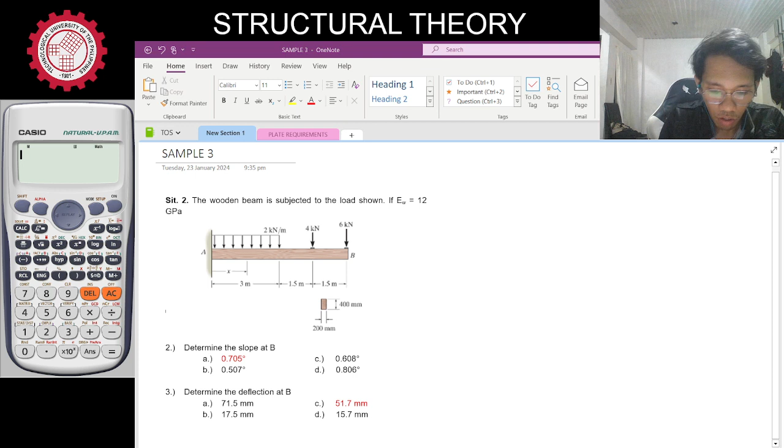This time, let's show that we can use the slope deflection method to solve for slope and deflection, not just for indeterminate reactions. So we have here a wood beam subjected to the load shown, with elasticity of 12 gigapascals. We are asked to solve for the slope at B and the deflection at B. I know you can solve this using double integration method, area moment method, or conjugate beam method, but another possible option is the slope deflection method.

Since this type of problem is a cantilever beam with fixed support at A and free end at B, the reactions can be solved easily. Since this is a determinate structure, let's first solve for the reactions.

Again, our loadings applied on the beam are all downward loads, so the moment resistance at the left support will be counterclockwise. So let's set that up: we have moment AB, which is counterclockwise. To solve for that moment, we sum up moments at A and equate to 0. Since our moment reaction at AB is counterclockwise, it becomes negative moment AB. Let's write that: negative moment AB. And then all loads will cause clockwise rotation with respect to A.

Let's solve first for the uniformly distributed load. Plus area first: 2 by 3, and the moment arm is half of the base, so this is 1.5. Next, the concentrated load of 4: also clockwise, so plus 4 multiplied by moment arm of 4.5. Then the concentrated load at the free end: also clockwise rotation, so this is positive 6, with moment arm also 6 meters. Then we equate this to 0.

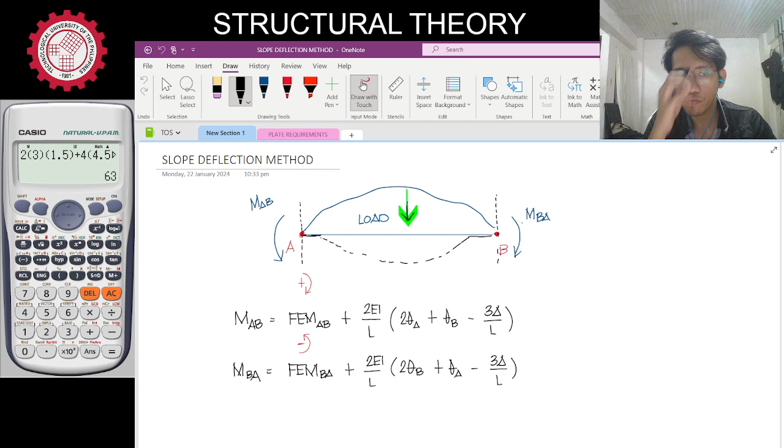Now let's apply the slope deflection method. From the previous discussion, before you use the slope deflection equation, you need to solve for the fixed end moment of our loading. Since this is a single span, what we'll do is get the loadings from the beam, and then replace the supports with a fixed support to get the fixed end moment. So let's say B is now a fixed support.

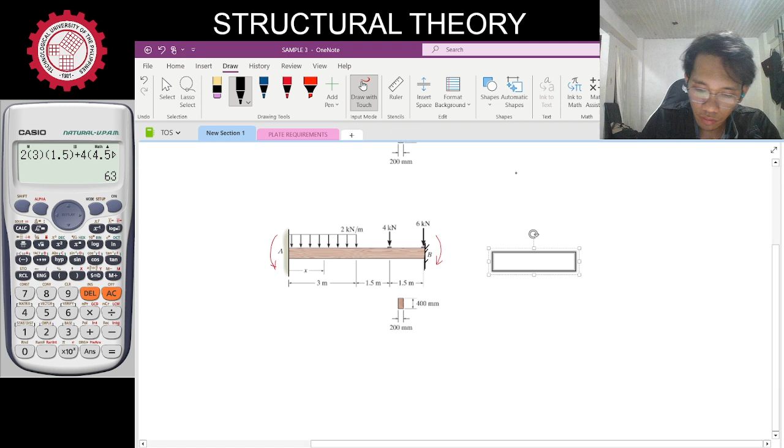So let's now solve for the fixed end moment for AB and BA. Again, for fixed end moment with a downward load, the moment at A will be counterclockwise while the moment at B will be clockwise. Let's take the loadings one by one, starting with the rectangular load for the first 3 meters. Here it is: fixed support on this side, and another fixed support on the other side, with a downward load of intensity 2 kilonewton per meter.

For the dimensions: our base of the rectangular load is 3 meters, and 3 meters remain on the right side. So this is now our loadings for the first load; let me just fix the line.

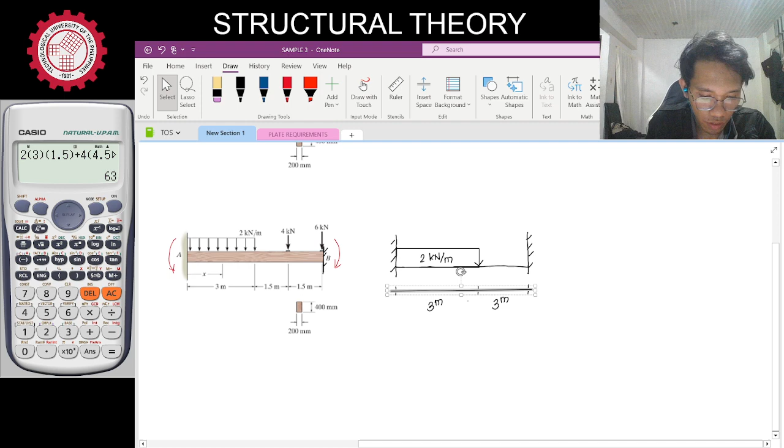Next, you have two concentrated loads. But as you can see, the 6 kilonewton load is at the free end. When that happens, applying the formula for fixed end moment, PA B squared over L squared or PA squared B over L squared, the dimensions are such that since it's at the free end, your B dimension becomes 0. Therefore, the fixed end moment for the concentrated load at the free end will be equal to 0, since dimension B is 0, so we don't need to solve for its fixed end moment.

So the only load left to solve is the 4 kilonewton load. For the 4 kN load, it is located...

This is located 4.5 meters from the left support and 1.5 meters from the right support, so a total of 6 meters for the span.

Okay, so let's focus on AB first. Let's label it - this is A, this is B. So for the first load, you have a uniformly distributed load.

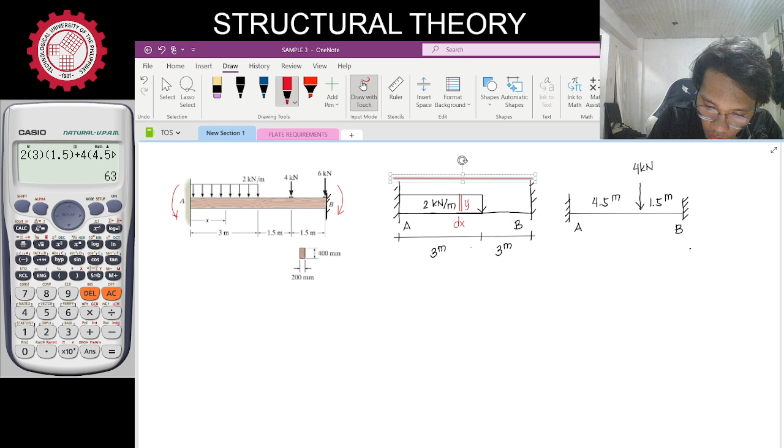We will represent this by a rectangular strip since we may not know the formula directly for this type of load, so we'll integrate. Let's set the dimensions of that rectangular strip from the left and right support. Let's say the distance of this representational loading to the left support is x, while the distance at the right support is total length 6 minus x.

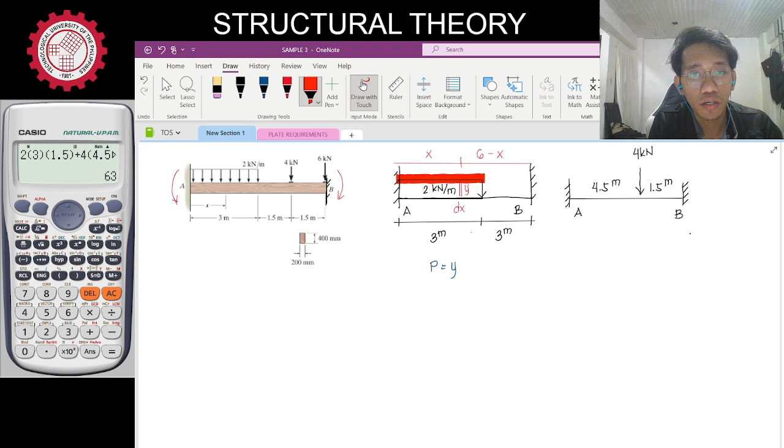Our P in the distributed load is just equal to the y value, which represents the intensity of the load. As you can see by inspection, for varying x, if x increases, y is a constant value - it doesn't change in height. So y is constant and equal to 2 kN per meter. So our P in the formula will be equal to 2.

So let's now solve for moment AB. For this topic, the fixed end moment has a sign convention - let me show it again. Positive when clockwise, negative when counterclockwise. Since moment AB is at the left side, the moment resistance there will be counterclockwise.

So we will set this as negative for the first loading, and apply integration. Integral of P, our P here is Y which equals 2. A, your left dimension, is X. B is 6 minus X. And the one squared here is B, since we are solving for the moment at left, the right dimension is squared. Divided by the total length, which is 6 squared.

The limits define the location of the loading. This is x equals 0, that's the start of the load. Then after that, the end of the load - our loading ends at x equals 3. So the limits applied here are 0 to 3.

Next, for the concentrated load on the right - again, moment AB here is counterclockwise, so we adopt a negative sign. No need to integrate since this is a direct concentrated load, so just apply the formula. P is 4, left dimension is 4.5, and the right dimension is 1.5 squared. Total span is 6 squared.

Magkakaroon ka ng delta na equal to 0 since all of those points have no deflection or no settlement. So therefore, all of those points are at the same level.

Pero for this problem, we are choosing points A and B. So if you will analyze the elastic curve for this type of beam, of course fixed support, so no slope, so magsisimula ito ng horizontal.

And then, since siya ay support, wala ring deflection. But at the right end, which is a free end, so wala siyang support. So ito, dedire-diretso lang to pababa. O, i-exaggerate lang natin.

Okay, so kahit beam problem ito, since pinili mong point is walang support, so magkakaroon ka ng delta. Hindi ko pwedeng cancelin yung delta dito sa equation na to. But you can see na ang point A is a fixed support. So you can cancel the slope A. So slope A here is equals to 0 since the support at A is a fixed support.

And then for moment AB, so from the previous computation natin, since nga this is a determinate structure, so you can easily solve for the moment at AB, yung actual moment at AB by using equilibrium equation. And we know na ang value for moment AB is just equal to 63 kilonewton meter.

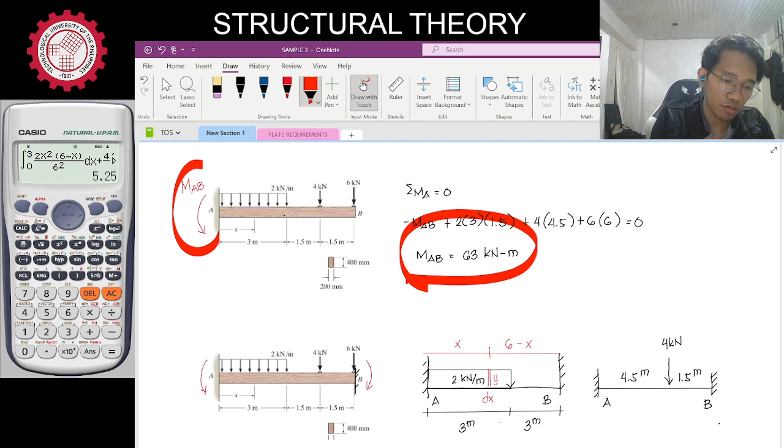But don't forget the sign. Okay, so since we have here a sign convention, so for moment AB, ang sign convention natin is magiging negative since this is a counterclockwise rotation. So we can now substitute the value of actual moment at AB. So this is negative 63.

Okay, so let's simplify this for this equation. So dumo tayo sa 2 over 6. So that is 1/3 multiplied by slope B. So that is simply 1/3 of slope B.

Next, yung L pala substitute natin. L here is 6. So you have 1/3 times 1/2. Yung 3 over 6 is 1/2, di ba? 1/3 times 1/2, so that becomes 1 over 6.

So negative yan. So negative 1 over 6 of delta. And then for the constant value, transpose natin to dun. Transpose mo yan, so that becomes positive. So you will have negative 63 plus 5.25. So this is now equal to negative 57.75.

Negative 57.75. So let's set this as our equation 1.

Next, another slope deflection equation na pwede na gamitin is yung kabila naman. So we apply now the equation for moment BA. Okay, moment BA is equal to fixed end moment BA. So that is equal to positive 5.25. Okay, positive 5.25.

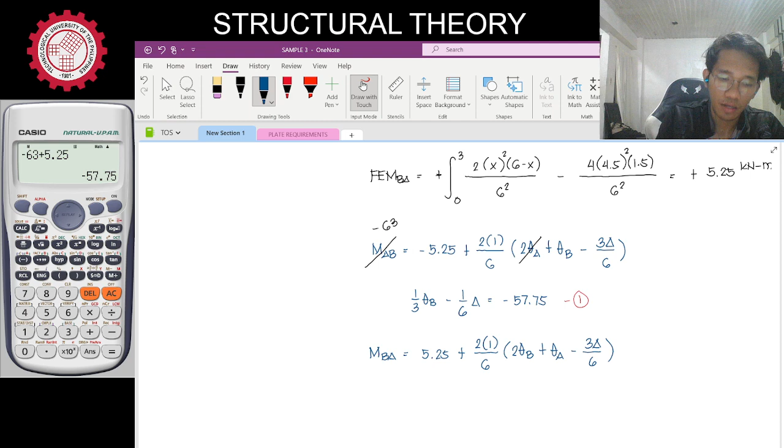5.25 plus 2 constant EI over L. Our L here is 6, multiplied by 2 theta B plus theta A, minus 3 delta over L. L is 6. And then we cancel the value for slope A since this is equal to 0.

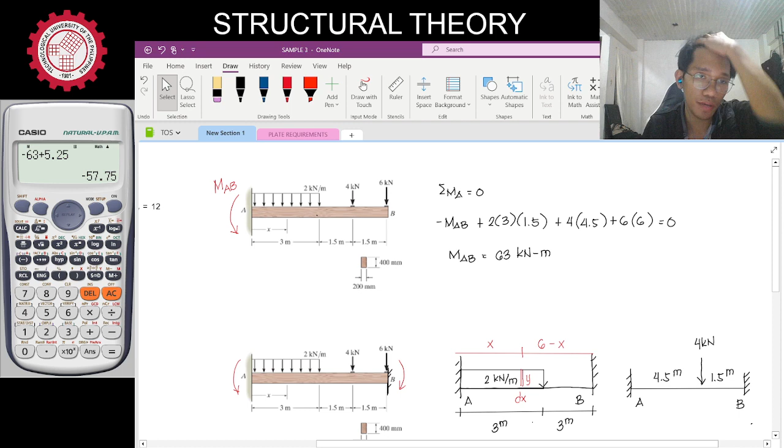And moment BA, guys, is the actual loadings yung sa actual na problem natin. Moment BA or the point B is a free end. So moment there should be equal to 0. Walang moment dapat sa free end. So this is now equal to 0.

So let's simplify this equation. So you have 1/3, multiplied by 2. So that is equal to 2/3.

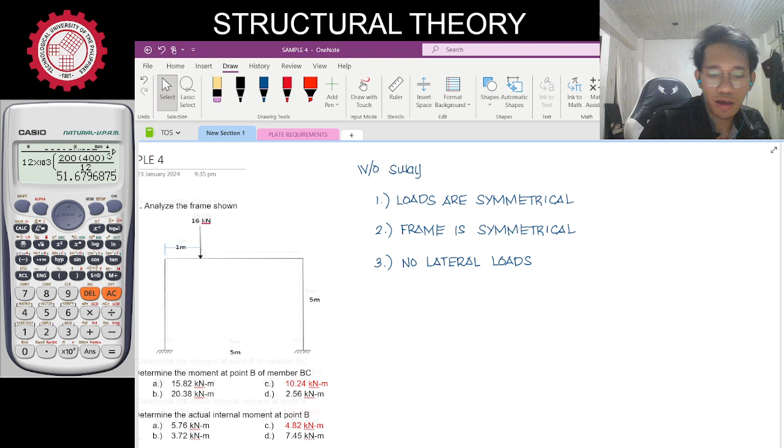So, that's now a frame with sway. Okay. And pangatlo, lateral load. So, kung may horizontal loadings, let's say may ganito. Ano ba usually yan? Wind load or earthquake load. So, pag may ganyan sa problem, so that is technically with sway na agad. Paano yung sinasabi nating with existence of support or lateral support?

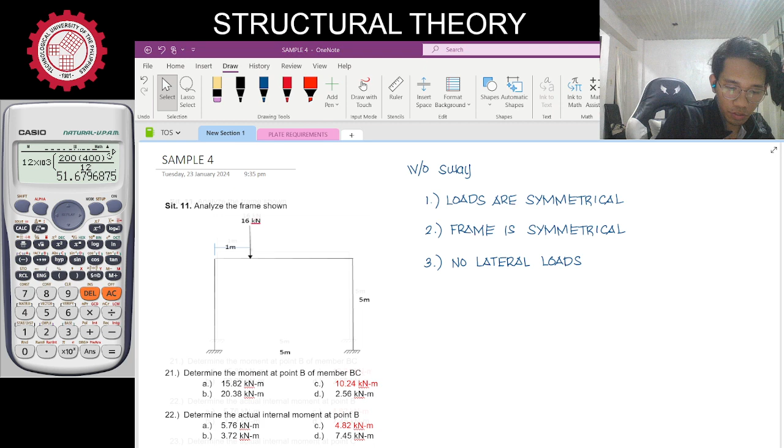Okay. So, tingnan nyo tong problem natin na sample dito. May frame tayo. So simple lang yung frame actually, 1 story, 1 bay lang. Pero, as you can see, unsymmetrical kasi yung load, no?

So, yung 16 natin naka-allocate 1 meter from the left end, so 4 meters siya sa right end. Kasi ang total bay length is 5. So, 4 meters to. So, obviously, ito may sway.

Ano ba yung sway? Parang yung frame mo will tend to rotate kung saan mas mabigat na portion ng frame. So, since ito ay fixed support sa ground, lagyan ko letra A, B, C, D. So, ang magiging ano nito, elastic curve. Kung i-illustrate ko, gaganito siya. Horizontal muna ulit dito sa ground kasi nga fixed support, walang slope, and then magsusway siyang pa ganyan.

Okay? Tapos syempre, ideally, kung ano yung naging sway ng column mo sa left, yun na din ang sway ng lahat ng column mo sa story na yan. So kumbaga, per story, isa lang ang value ng sway. We are assuming na pare-pareho na sila ng value ng sway. Nasaan yung sway dyan? Kasi upon application ng loadings, ang mangyayari, mapupunta na dito

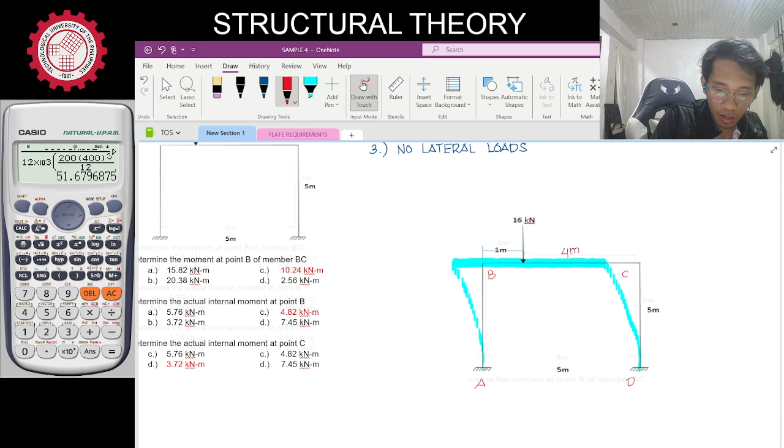si point B and mapupunta na dito si point C. Okay? So nag-ano na ngayon, pag kinonsider mo ngayon yung structure AB or the column AB, so you have now a horizontal shift or horizontal displacement. So that is now your sway. Okay, so kaya

eto, makaklasify natin tong frame na to na with sway. O yan, delta, delta. Ngayon, yung number 4 criteria, if there is an existing lateral support. So, let's say na yung problem na na-encounter nyo, may hinge support dito. Kunyari, hinge support. So, usually, sa actual, kunyari, may shear wall dyan. So, technically, meron ditong reactions. So, horizontal and vertical reaction kasi hinge.

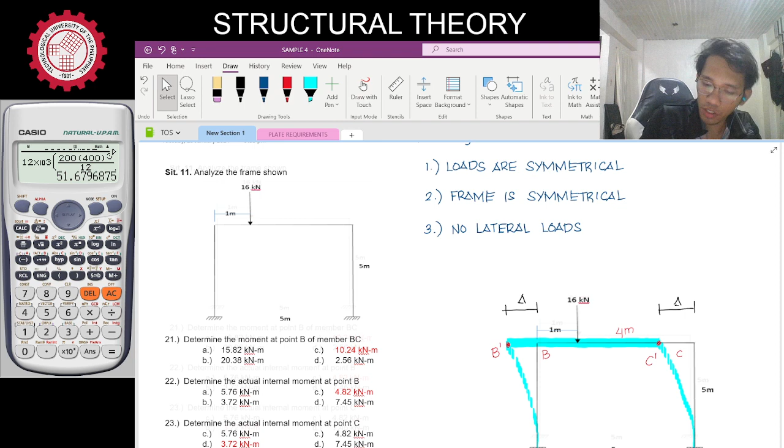Pero ang pinakamalaga yun, yung horizontal reaction. So, that will resist the sway na mangyayari dun sa frame mo. So, you can classify the structure now as without sway if there is an existing lateral support. Pero sa problem na to guys, wala, no? So, we will analyze this problem na may sway or with sway ito guys.

Okay, so ang unang tanong, determine the moment at point B of member BC. So, assuming na dagdag nyo dito sa problem na to, determine the moment at point B of member BC, assuming that all joints or all points here are fixed supports. Okay. So, parang yung A, fixed support, B, fixed support, C, fixed support.

Parang ganun. So, technically, ang tinatanong dito sa una guys, kung magiging fixed support ang BC, at tinatanong niya yung moment at B, member BC. So, technically, that is simply the fixed end moment at BC. Okay. The next question is, determine the actual internal moment at point B. And number 3, actual internal moment at point C.

Okay. So, let's now solve for the fixed end moment muna ng BC. Okay. So, bakit BC lang ay solve natin? Kasi pag tinignan yung maigi, yung column natin, yung AB, at saka yung CD, wala namang present na load, di ba? So, if you have no loads applied sa isang structure, so, for solving fixed end moment, so that will be equal to 0. Kasi walang load eh. So, 0 lang yung fixed end moment natin. So, ang kukunan lang natin ng fixed end moment dito is the member BC.

Okay, so, kukunin ko yung girder BC, gagawin ko siyang restrained structure o restrained beam, fixed at both ends, and then ilagay natin yung load. So, we have here 16 kilonewtons, located 1 meter from left and 4 meters from right. Okay. So, apply now the fixed end moment equation. So, lagay ko yung joint B, C.

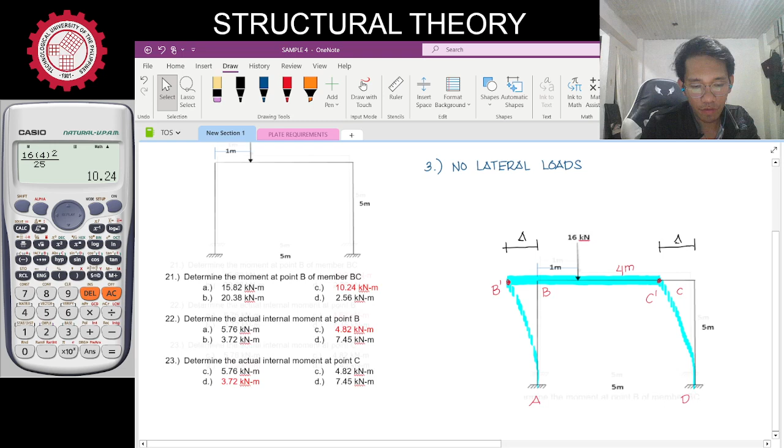That's 10.24, and that's actually already the answer for the first one since that's the fixed end moment. Okay, let's now proceed to solving the fixed end moment at CB.

Fixed end moment CB: clockwise for CB, so this becomes positive, that's the right moment. This time, the left dimension is squared. So 16 multiplied by 1 squared multiplied by right dimension of 4, divided by L squared or divided by 5 squared. So the answer now is 16 times 4 over 25, which is equal to 2.56, positive 2.56 kilonewton meter. Okay, so now you have the fixed end moments.

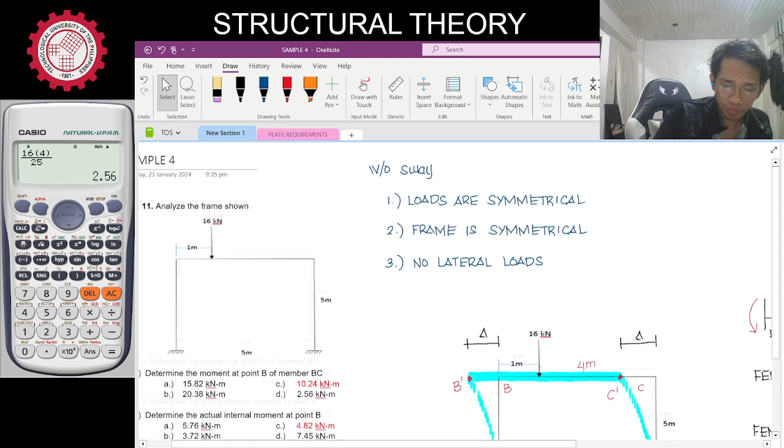Again, for the two columns, their fixed end moment is 0. And for this problem, nothing was said about EI. So you will treat this problem as constant EI only. EI is constant, so therefore we can set that value equal to 1.

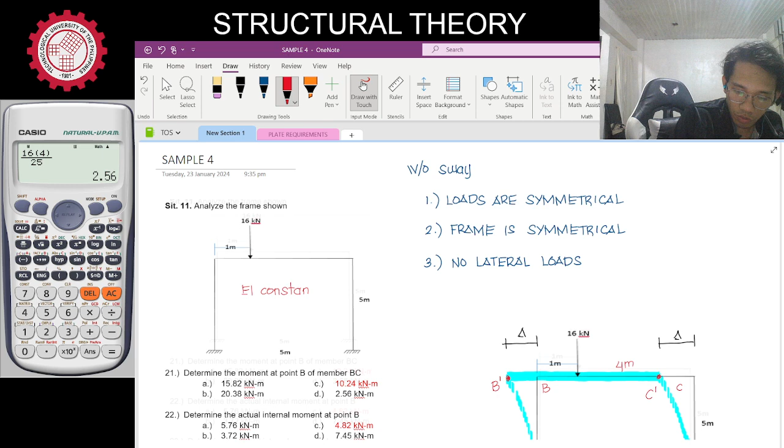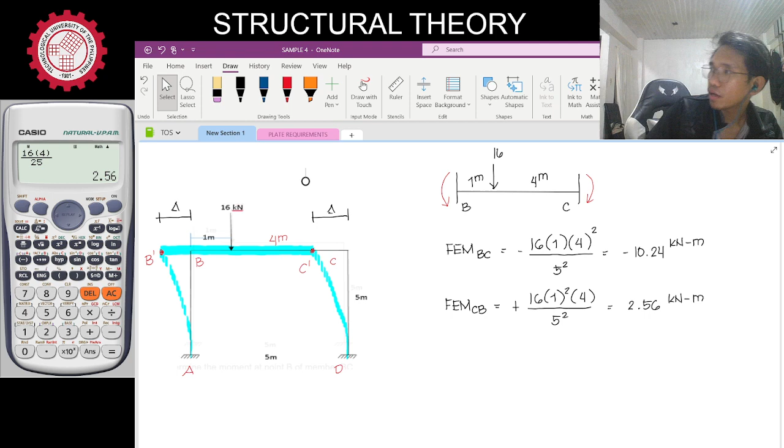Okay, so how many structures do we have here? You have 2 columns and a beam, so that's 3. So the initial number of equations is 3 multiplied by 2, we will have 6 equations here. And then those 6 equations will be reduced depending on the unknown degrees of freedom.

Let's go to the slope. For slope, the slope at A and at D is 0, so it's not unknown, 0 at A and D. But for B and C, since these are considered rigid joints, there is slope present at B and C. So you have 2 unknown slopes.

And then you have an unknown delta for this single story. So how many unknowns total? 2 slopes, 1 delta. So from 6 equations, this will be reduced into 3 equations. So let's list the slope deflection equations.

Okay, so moment AB. Moment AB is equal to, the fixed end moment AB is 0, plus 2 times the constant EI over L. The span of AB is 5 meters as shown in the figure, multiplied by 2 times slope A plus slope B. And then let's look at A and B.

Again, you'll notice the structure is vertical, so there's a horizontal offset, meaning there's a delta present. So minus 3 delta over span 5. Okay, so slope A, as I mentioned earlier, is a fixed support, so this is 0. Moment AB has a value so it cannot be cancelled. Slope B has a value. Delta has a value. So you can now simplify.

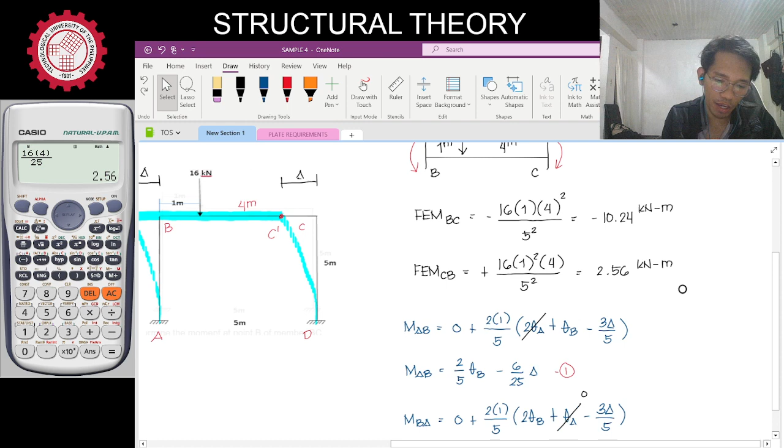So if you observe points B and C, they are on the same level. That means for girder BC, the settlement of girder BC will be equal to 0, because based on the behavior of the structure, B and C will remain at the same level. So we will set delta for girder BC equal to 0.

Okay, so let's now write the equation for moment BC. Fixed end moment BC, we have solved that earlier, so this is negative 10.24.

Okay, plus 2 constant EI over L. What is the length of this girder or the bay length? 5 meters pa rin guys. So the length that I will apply here is 5 multiplied by 2 slope B plus slope C. Na-explain ko na, walang delta, so hindi ko na ilalagay sa equation since walang delta.

Moment BC is an internal moment, so it has a value, so you cannot cancel that out. While slope B and slope C are both rigid joints, so again, may values rin sila. So simplify na lang natin.

So moment BC is equal to negative 10.24, plus 4 over 5 slope B plus 2 over 5 slope C. So this is now equation 3.

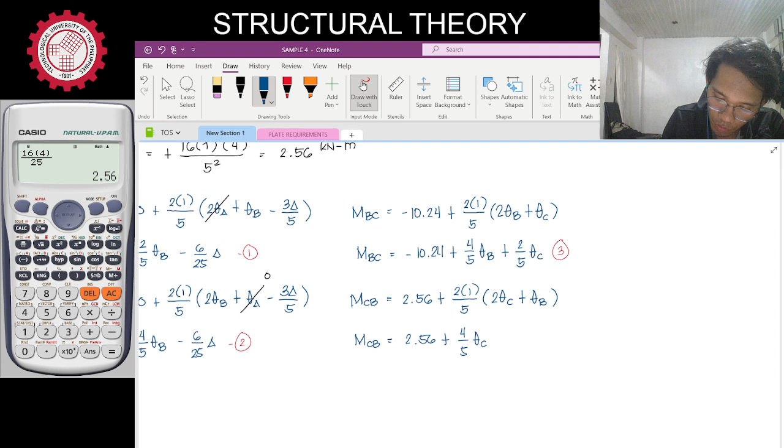Delta is 0, so I will not write the third term, 0 lang naman. Moment CB is an internal moment ng frame, so it has a value, so you cannot cancel that out. So you just simplify this equation. Moment CB is equal to 2.56 plus 2 over 5 times 2, so that becomes 4 over 5 of slope C plus 2 over 5 of slope B. So this is now our equation 4.

Next we proceed to the next structural element, and that is the column CD. As you can see, column CD, there are no present loading, so for this column, our fixed end moment will be equal to 0. But there is a present sway since the column CD is initially a vertical structure. So upon applying the load, it has now the behavior drawn sa ating screens, so meron tayong i-consider na delta. And that delta variable is the same with the delta of the left column, so same variable lang, or same amount.

So let's now write the equation for that column. We will have moment CD. Moment CD is equal to fixed end moment CD, guys, so 0, plus 2 constant EI over span. Ang span CD here is 5 meters. So 2EI over L multiplied by 2 slope C plus slope D, minus 3 delta over span CD over 5. Okay, so ano pwede cancelin?

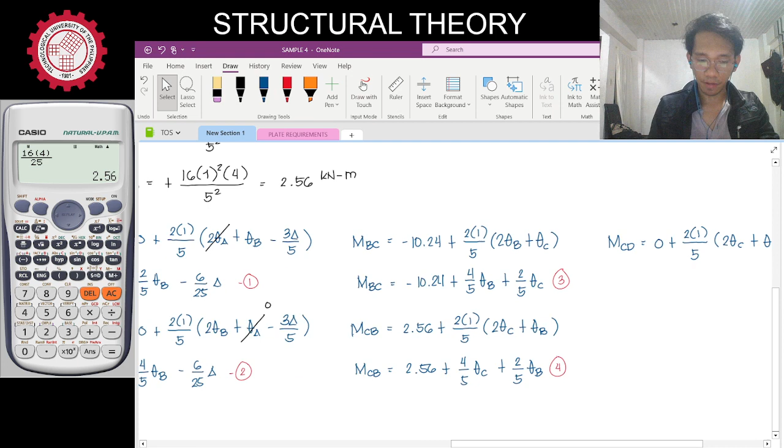Moment CD is an internal moment, so that has a value. Slope D, ayan, point D is fixed support, so slope D is 0, so pwede natin cancelin. Delta, meron. So ayan, simplify this equation.

So we will have moment CD is equal to 2 over 5 times 2, so that becomes 4 over 5 slope C, plus or minus rather 2 over 5 times 3 over 5, so this is 6 over 25 delta. So this will now serve as our equation 5.

And then let's write the counterpart equation for the structure, yung kabila. So moment DC naman. Moment DC is equal to fixed end moment 0, plus 2 constant EI over span 5, multiplied by 2 slope D plus slope C, minus 3 delta over 5.

So just like with equation 5, we can cancel slope D, so let's set that as 0. And then moment DC, you cannot cancel that kasi fixed support, so you have a value for moment DC. So you will now simplify this equation. Moment DC is equal to 2 over 5 of slope C, and then minus 6 over 25 of delta.

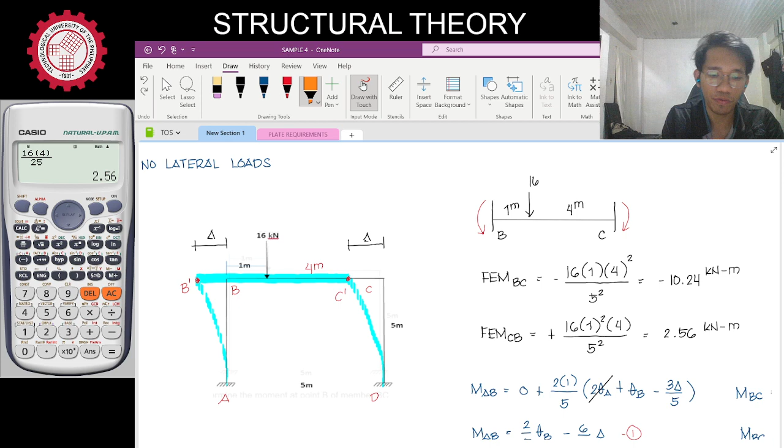So our working condition here is the joint condition at C: this is the internal moment from the girder CB, plus the internal moment at the column CD, and this is now equal to 0.

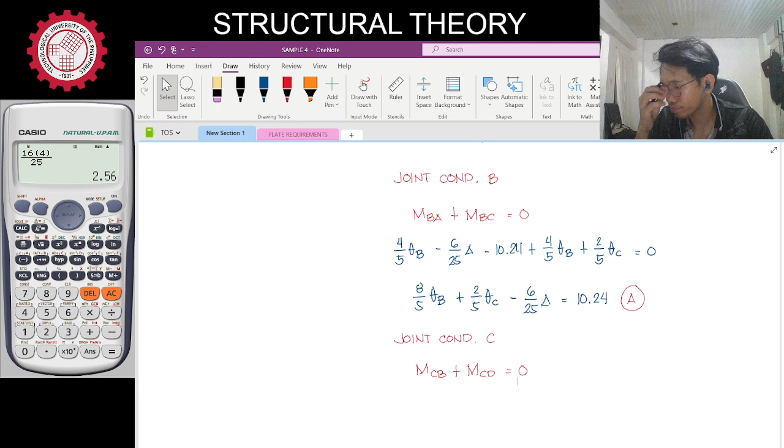By the way, you don't need to think about the rotation of the internal moments. The safest way to formulate the equation is to just consider them as positive values, because later on, since our sign convention here is based on rotation, each moment like moment BA technically already has its own plus or minus sign. So the safest approach is to keep everything positive: if it turns out clockwise, positive of a positive value stays positive; if it turns counterclockwise, that's negative of a positive value, so it becomes negative. That way you're not affected by how you assign the sign convention. Also, for the operation between terms, just use addition always, so the math doesn't get mixed up later when the sign convention for the rotation of moments is applied. Because if a moment turns out counterclockwise and is already negative, and you also made the operation a minus, then minus of a negative becomes addition, which would make the operation wrong. So again, the safest way is to keep everything positive.

Okay, so let's now use this joint condition: moment CB plus moment CD. Let's substitute. Moment CB is from equation 4, let me get that. Equation 4 is 2.56 plus 4 over 5 of slope C plus 2 over 5 slope B.

And then moment CD is from equation 5. The value of moment CD is 4 over 5 of slope C minus 6 over 25 of delta. So I'll attach that here to form our equation. Let me copy moment CD here: plus moment CD, since it's a positive value. So our equation will look like this.

So let's equate this to the external moment at C, which is 0, and simplify. For slope B, there's only one term, so we just copy it: 2 over 5 of slope B.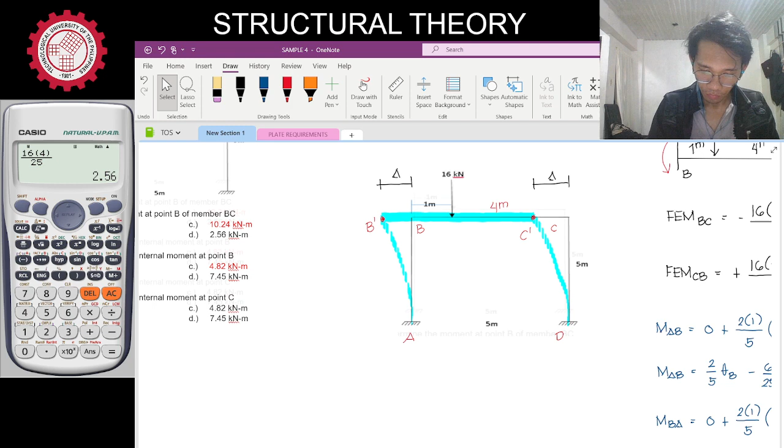Okay, so this will now serve as our equation B. So we have now two equations. Pero ang unknown degrees of freedom is 3. So saan manggagaling yung third equation? Ubos na ang joint condition natin kasi yung A and D, both A and D, there's single structure lang yung nakakabit sa kanya. So we cannot apply the joint condition. So saan manggagaling yung aking third equation?

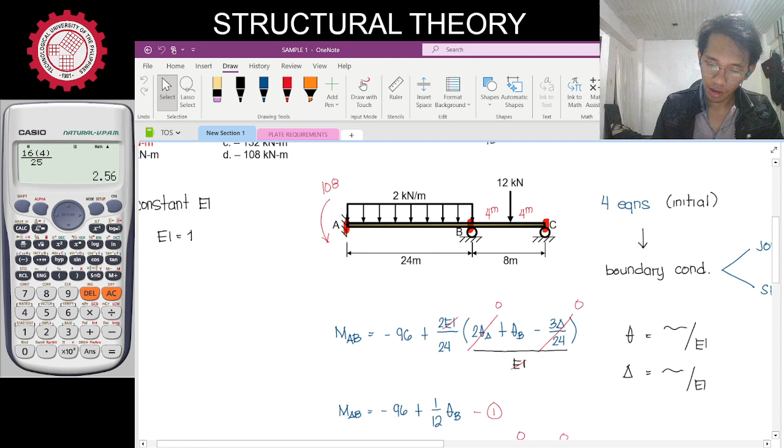Okay, so sa third equation, sabi ko nga sa inyo, kapag merong sway involved, that's the time na lalabas itong boundary condition mo na isa, yung shear condition. Yun ang i-apply natin. To be specific, yung shear condition na yon, ang tinutukoy natin na shear doon is shear at the column. Sa akin, ang technique ko, para safe, lahat ng sign convention of unknown variables should be positive.

Kasi nga, meron pa tong sign convention ng direction or ng rotation. So sabihin natin, ito yung point A, point B, point C, point D. Okay, so I will apply a shear doon sa column. To be specific, pag column, ito yung cross section. So ang shear dyan is either horizontal or load perpendicular to your screens. Syempre, two-dimensional analysis lang tayo. So we will consider the shear force as the horizontal force present sa column. And for this problem, ang horizontal force is yung horizontal reaction ng fixed support.

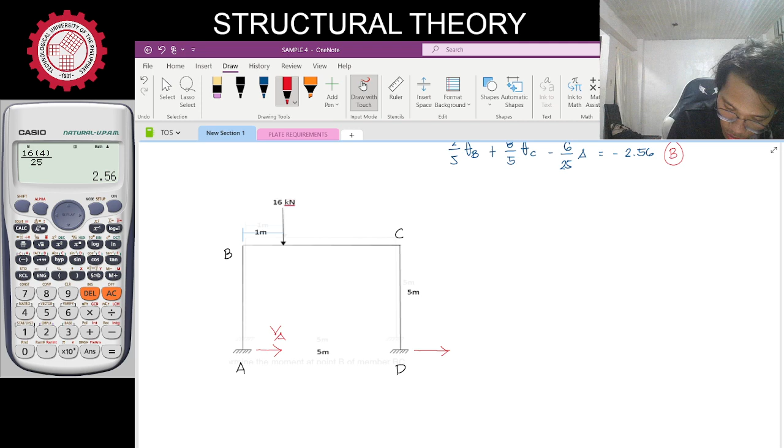So consider natin, this is shear A, horizontal reaction sa fixed support, and then you have here shear D. Okay, so paano i-apply ang shear condition? Ganito lang kasimple, guys. Ang shear condition is just equilibrium equation, no? So you will just sum up forces horizontal and then equate this to 0.

Considering the frame na nakikita natin ngayon, sum up horizontal, so you just have shear A plus shear D is equal to 0. So ang tanong mo ngayon dyan, mag-0 ba talaga yan para yung pakanan? Again, yun nga ang sinabi ko sa inyo kanina, we know na meron pang directions yan. So ang proper direction yan will be represented by a sign convention. So again, these variables have their sign convention na plus or minus.

Okay, so kaya ang sabi ko nga sa inyo, kagaya nung kanina, safest way to formulate an equation through this method is positive lang muna lahat and then mathematical operations should be plus or addition. Okay, so the problem now is all of our equations or all of our initial equations from 1 to 6, those equations are all moment equation. Now, for our condition here, third condition, shear condition, the variable here now is a shear. So the problem is how can you convert that shear variable papuntang moment? Okay, so ganito naman yan.

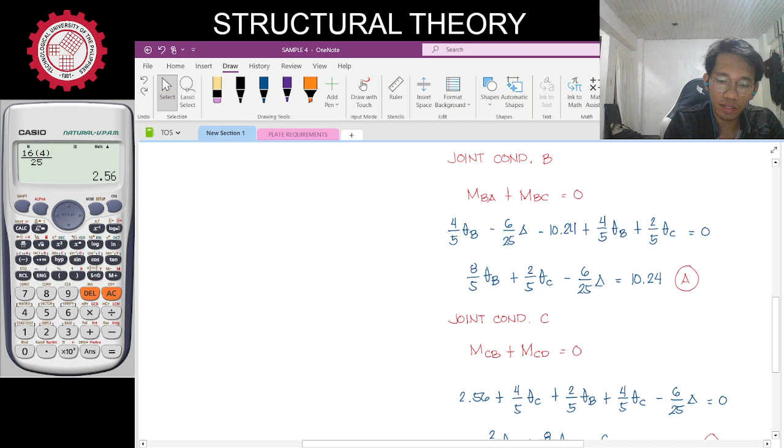So to have the value of shear na naka in terms of moment, you will consider yung isolated cases ng kada column. Okay, so I will consider the left column. I will draw the left column AB. So ito ngayon yan siya, left column. Okay, so this is point A and this is point B. So tinanggal ko, diba? So we all know na meron ditong mag-activate na internal forces. So you have the internal moment, you have the internal axial load or the vertical load, and you have the internal shear. But our focus here is at the rotation.

Okay, so sa simula, you don't know the proper or the actual rotation of those moments, top and bottom, no? So let's say you have here a clockwise moment sa BA. Sample lang, clockwise moment sa BA, clockwise moment sa AB. So the idea here is, regardless of the rotation of the top and bottom moments, you will have an unbalanced moment, no? Kasi hindi naman yan magiging equal. Unbalanced moment, yan yung magiging idea.

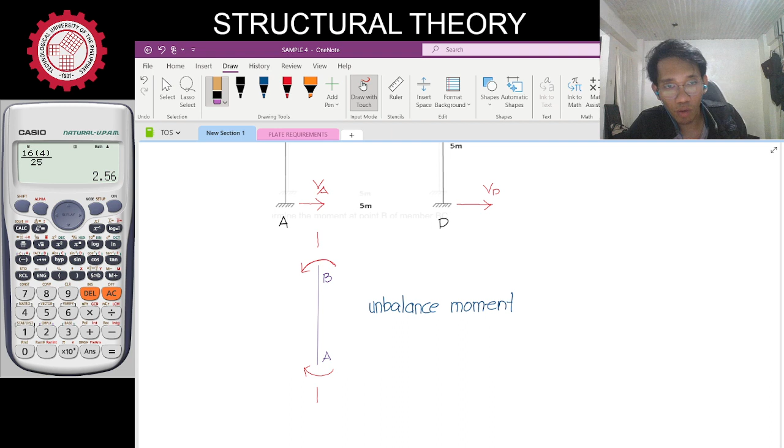You will have an unbalanced moment. So kahit gawin kong kunyari, sabi natin, paano pag nagkontrahan? Ayan, isang clockwise, isang counterclockwise. So what will happen? Sabi mo, balance na yan kasi clockwise yung isa, counterclockwise yung isa. Due to the asymmetry ng figure, you cannot say na those values, top and bottom, are equal. So if this is 10, you cannot actually tell na 10 din yung nasa taas kasi nga unsymmetrical. So kahit maging opposing direction or opposing rotation sila, if the magnitudes are not equal, you will still have an unbalanced moment. So hindi mo masusunod ngayon yung equilibrium condition of the structure.

So regardless yan na kung ano maging rotation, you will have the unbalanced moment. So keep that thought. So ngayon, paano mo ngayon ma-resist yung unbalanced moment? So that's the time or yan yung magiging essence ng shear dito. Yun yung magiging resisting moment dito. Okay, so let's say you have an unbalanced moment na clockwise, kagaya ng drawing ko.

So the shear here is at top and bottom, shear at top and shear at bottom. That is parallel forces. And obviously they will be opposite direction, because sum of forces horizontal, only those two are horizontal there. So they will be opposite direction.

So if these moments top and bottom are rotating clockwise, based on my drawing here - I'm not saying it's always like that - your couple shear should rotate counterclockwise. So if it's counterclockwise, this is now the direction, shear at A and shear at B. You can see the external moment at B and A is clockwise, while the couple moment produced by the shear is counterclockwise. So that's where it balances now.

Now, what is the working equation to solve for shear A? How do you relate shear A to the moments? Let's put here the name. So this is moment BA, and then the bottom moment, let's call this moment AB.

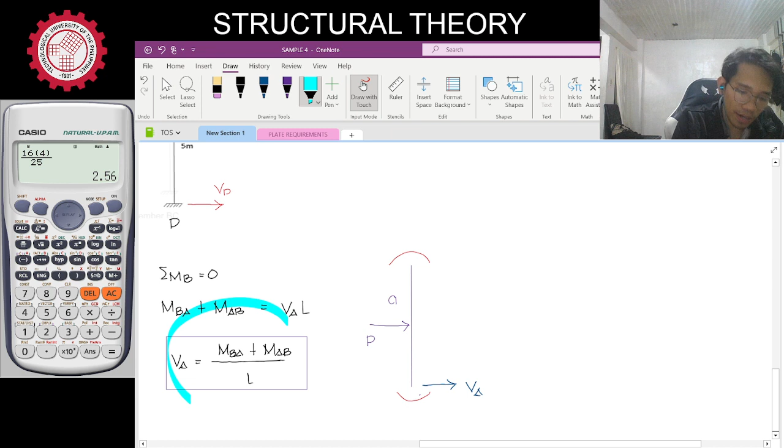So what will happen? This formula now for this type of loading is not applicable, because the derivation of that boxed formula was clear - it assumed the only loadings are moment top, moment bottom, shear top. That's the only loadings. But when there's an additional loading like this, you go back to the concept of deriving that formula - simply sum up the moment at the top.

So you will have moment top plus moment bottom, and then the moment produced by P, which is counterclockwise, so minus P times A, and your shear A is also counterclockwise, so minus shear A multiplied by L, equate to 0. So your shear A here becomes equal to moment top plus moment bottom, and with the additional external loading, minus P times the moment arm A, over L.

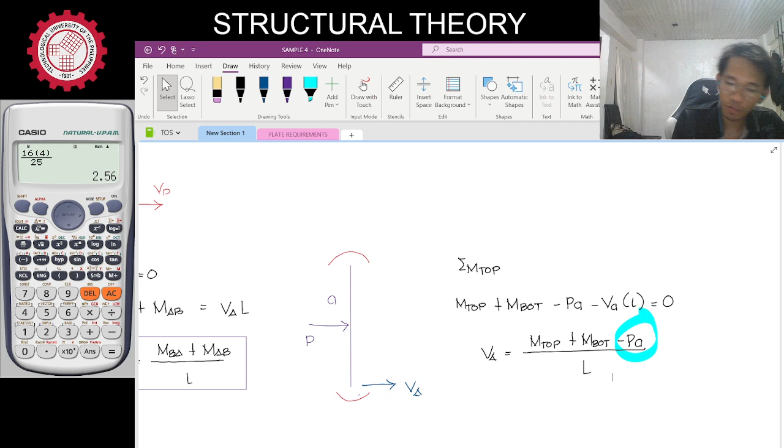So basically, there's an extension. If there is an external load present, the numerator from the formula will have an extension, and that extension is the moment of the external loadings, like that. So the point is, this is not a fixed formula - this is just the formula if there are no present lateral loadings on the column. But if there are, go back to the basic, go back to the concept - just sum up the moment at the top.

So let's now answer this problem. Let's copy this again. I just explained how the relation of shear to moment works.

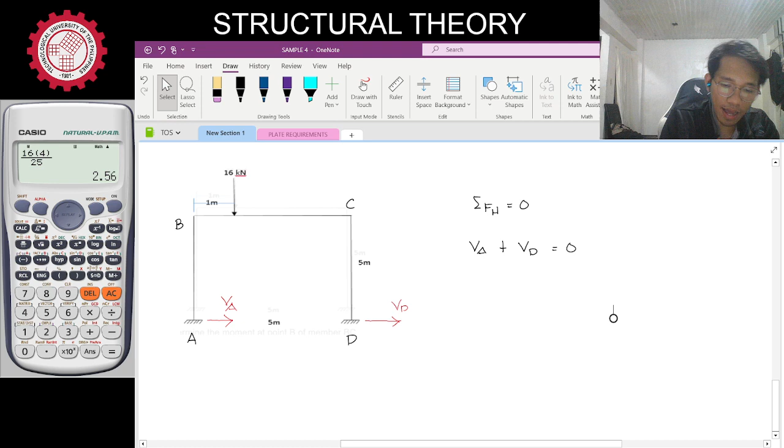Okay, for shear A, guys, shear A is just equal to moment top. Ito yung A ha. So, ang moment mo dyan, BA tsaka AB. Okay, so you will have moment top, which is moment BA, plus moment bottom, so moment AB. And then you will divide that by the length of that column. Length of that column is 5 plus

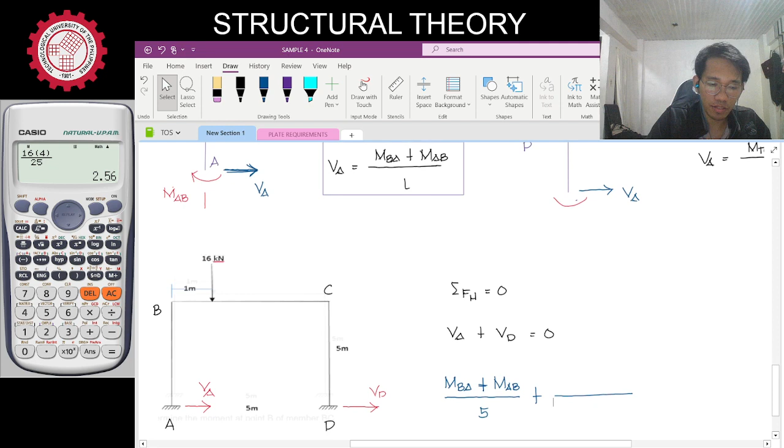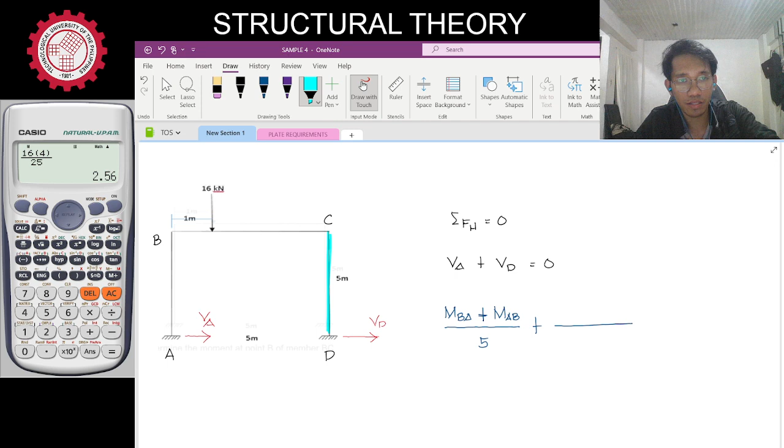Shear A na to guys ha, yung unang term, that is shear A. Again, the formula is this one, yung nakabox, since there are no loadings applied sa column. For shear D now is, this is your column CD, so moment at top is CD, moment at the bottom is DC. So we will have moment CD plus moment DC all over the span of CD, so that is equal to 5, and then equate that to 0. So ito, shear A plus shear D is equal to 0.

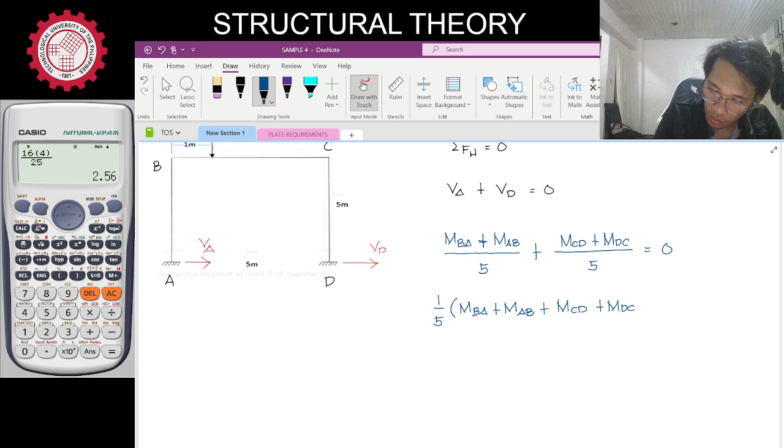Okay, simplify muna natin bago natin i-substitute ha. So we can factor out 1 over 5. So 1 over 5 multiplied by first term, so this is moment BA plus moment AB. And the second term, nilabas yung 1 over 5. So plus moment CD plus moment DC equal to 0. Cross-multiply mo yung 5. So 5 times 0, bali technically cancel na to. Or kumbaga, multiply both sides of the equation by 5. So cancel na itong 1/5. Cancel na yan. So bali matitira natin equation, moment AB plus moment BA plus moment CD plus moment DC.

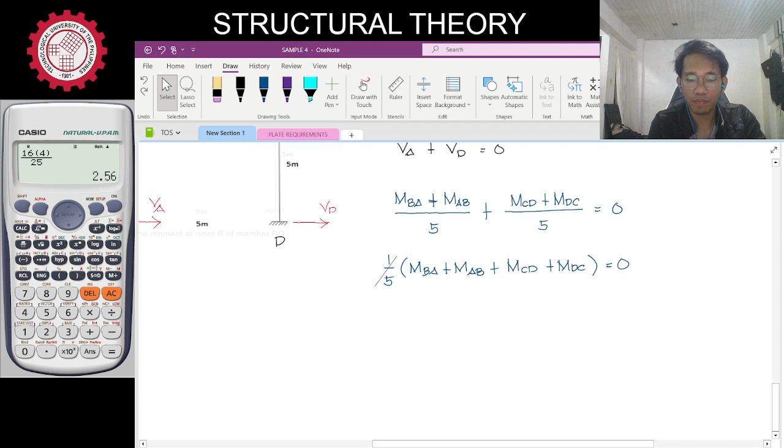So kunin natin yung mga yan. Nasaan ba yan? Ayan na, moment na siya, di ba? Moment BA, guys, moment BA is from, layo na. Moment BA is equation 2. Ayan, moment BA is equation 2. 4 over 5 slope B minus 6 over 25 delta. Okay, so ikakopy ko siya dito. Okay, so this is moment BA.

Moment AB. Moment AB is from equation 1. So ito naman ang value ng moment AB. Okay, moment AB is equal to this one. Copy ko lang ulit, dudugtong ko lang ha. So ito na, so bali may plus. Okay, moment BA plus this one. Moment AB. Okay, yun yung moment AB natin. Nilagay ito ng plus.

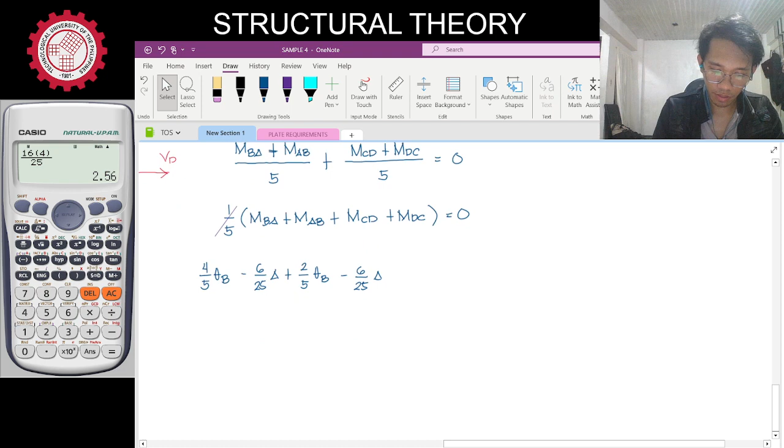Next, moment CD. Moment CD is from equation 5. Okay, this one. Moment CD is 4 over 5 slope C minus 6 over 25 delta. Ito naman yan. O, dugtong mo ngayon dito yan. Okay. So ito na, ito na yung pangatlo. Moment CD na ito, ha. Again, we will add that. Plus moment CD. That's the value of moment CD.

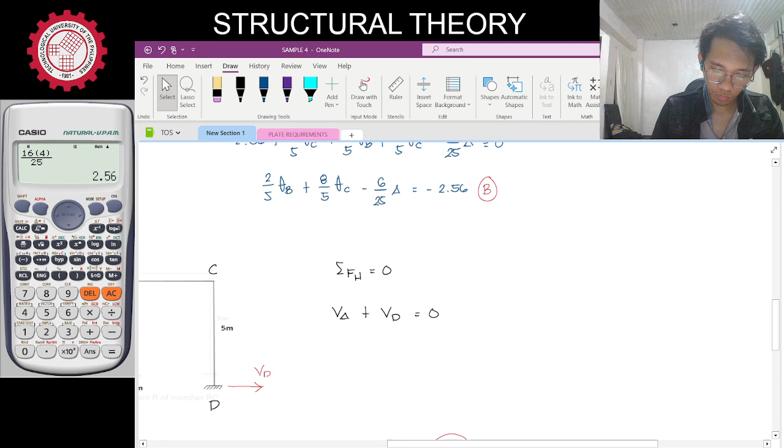Last, moment DC. Our moment DC is from, equation 6. Okay, moment DC is 2 over 5 slope C minus 6 over 25 delta. Okay, so idugtong natin. Ayan. Moment DC. Okay, so add natin to. Plus moment DC, and then equate to 0.

Simplify. Slope B muna tayo. Nasaan yung mga slope B natin? 4 over 5, 4 over 5, 2 over 5. The rest is wala na slope B. So pag pinag-add ko yan, 6 over 5, no? So 6 over 5 slope B.

Let's proceed kay slope C. Sa may mga slope C ko dyan. Slope C, 4 over 5, 2 over 5. Both values are positive. So add 6 over 5 ulit. So plus 6 over 5 of slope C.

Delta naman. Negative 6 over 25, 6 over 25, 6 over 25, 6 over 25. So all values are negative. Pare-pareho ng coefficient, so parang times 4 lang. So bali, 24 over 25, negative, so minus 24 over 25 of delta is equal to 0. And this will now serve as our equation C. Okay, so yan ay mga modified equation natin. We have now 3 equations involving theta, B, C, and delta. Yan, no? Equations A, B, and C. So we can now solve for those parameters, no?

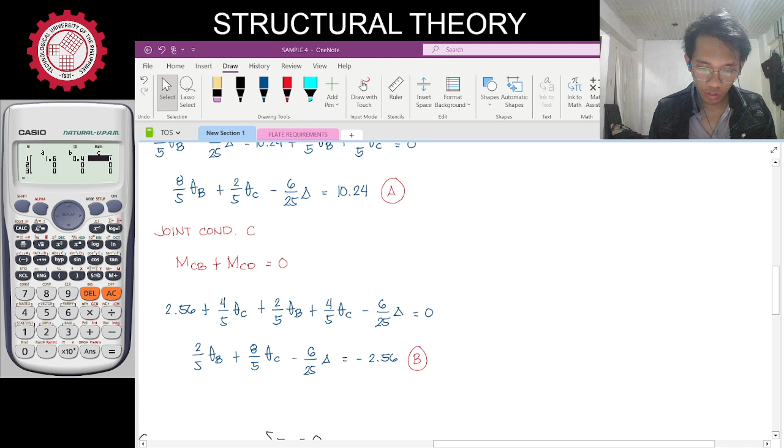Let's use now the mode of the calculator. So, mode equations, 3 unknowns tayo. 3 unknowns. Okay, coefficient. Equation A, ha? Coefficient for B is 8 over 5. Coefficient for C is 2 over 5. Coefficient for delta is negative 6 over 25. And then the constant is positive 10.24. Okay, equation B. Equation B, coefficient for slope B is 2 over 5.

Coefficient for slope C is 8 over 5, and the constant is 2 over 5, 8 over 5. Delta first though. Negative 6 over 25 for delta, and for the constant, that is negative 2.56.

And then for equation C, slope B is 6 over 5, slope C is 6 over 5, and delta is negative 24 over 25. Constant, 0.

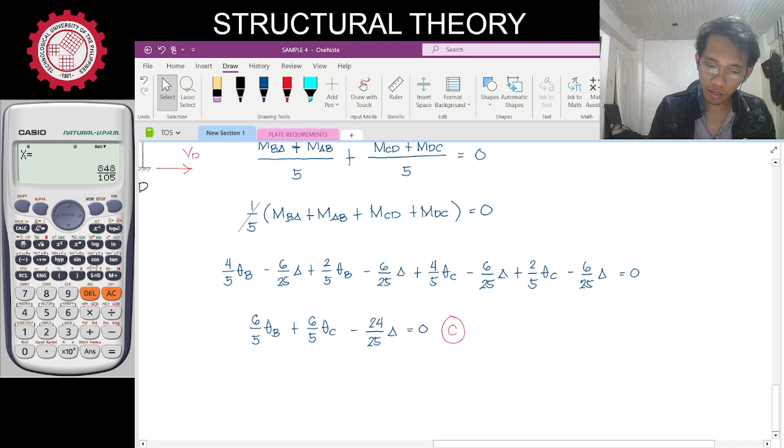Slope B is equal to, what was that, 848 over 105, kilonewton square meter over EI, because that's a slope, over EI.

How about slope C? Slope C is negative 272 over 105, kilonewton square meter over EI.

And then for our delta, value of this sway, delta, that is 48 over 7. Since delta is deflection, this is kilonewton cubic meter over EI.

Okay, so you now have the values for the unknown degrees of freedom. So the next thing to do is to solve for the moments.

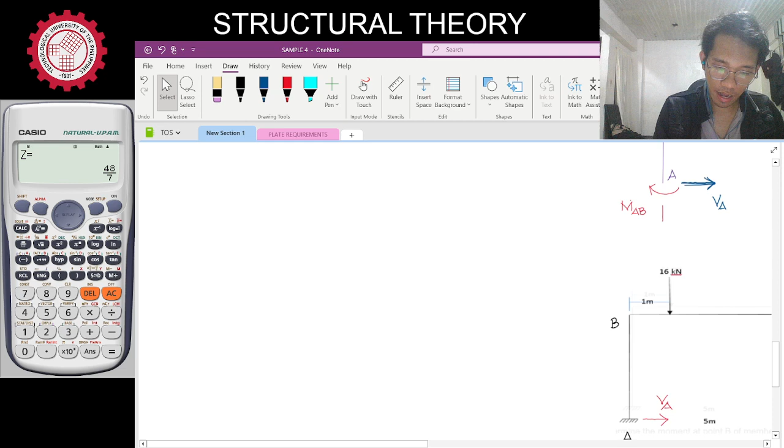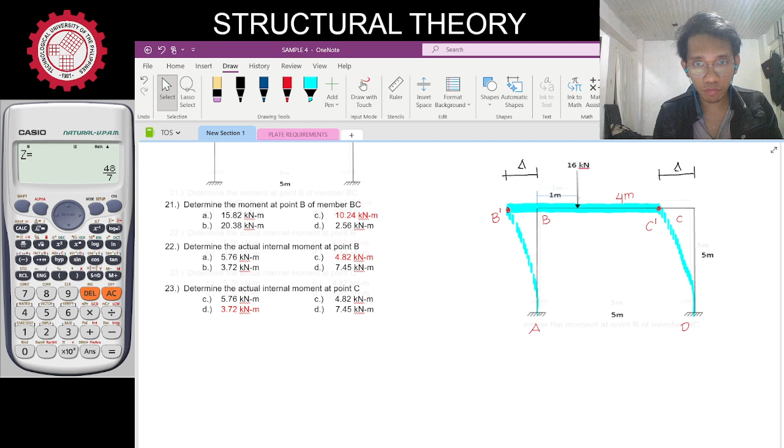Okay, so actually we can now answer this. The question here is moment - determine the actual internal moment at point B. So you can choose between BA and BC for moment B, and also moment C. Let's use the equation for moment BA.

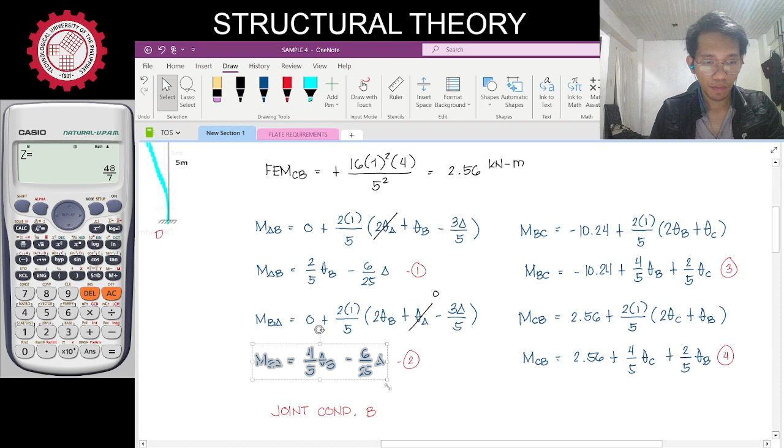I will copy this one. Okay, let's place it here. Our moment BA is this. So let's substitute the values.

Slope B is 848 over 105, positive, while delta is equal to 48 over 7, also positive. So the resulting value here will be equal to, going back to mode 1, 4 over 5 of slope B, so 848 over 105, plus - minus actually - 6 over 25 times delta, which is 48 over 7.

So our moment here is 4.815, positive, meaning clockwise. Positive 4.815 kilonewton meter. Now let's check the other side.

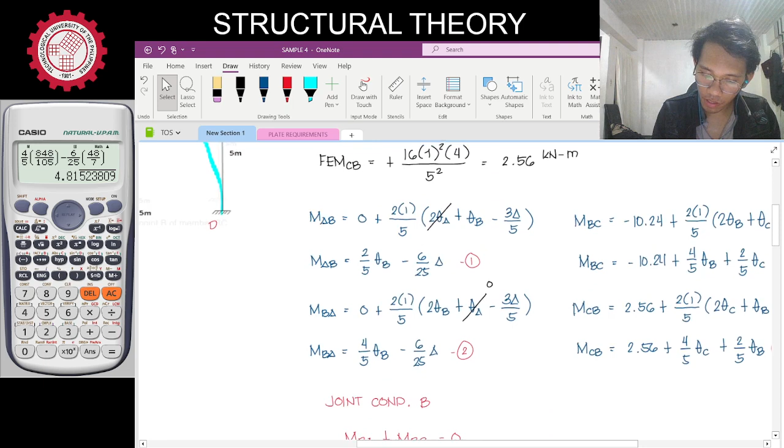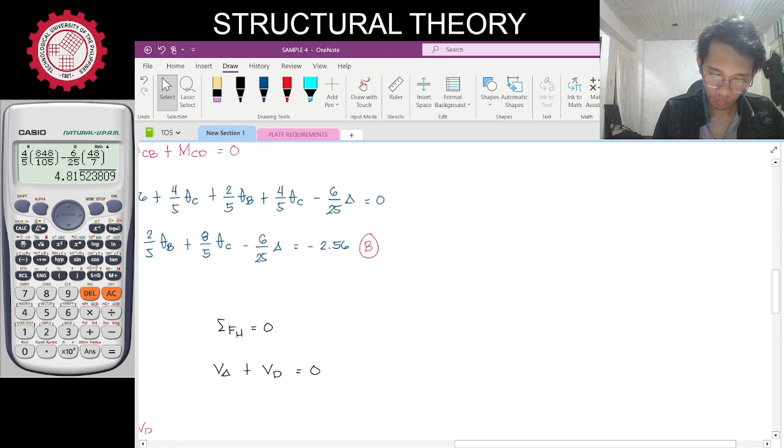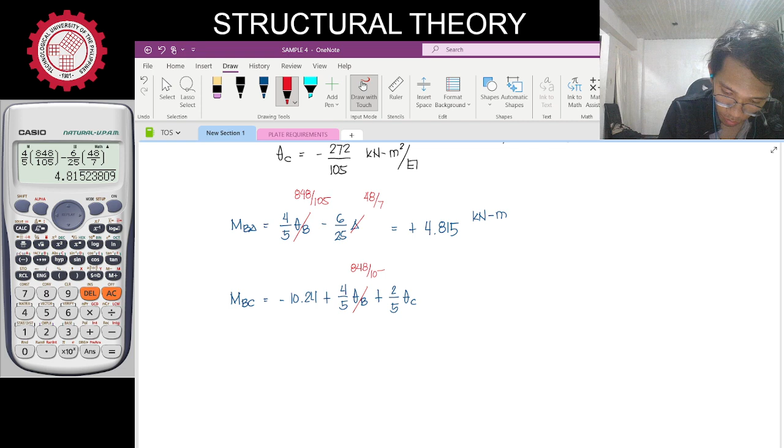Okay, so if you use moment BC, this one, let's substitute the values. Theta B is 848 over 105, while slope C is negative 272.

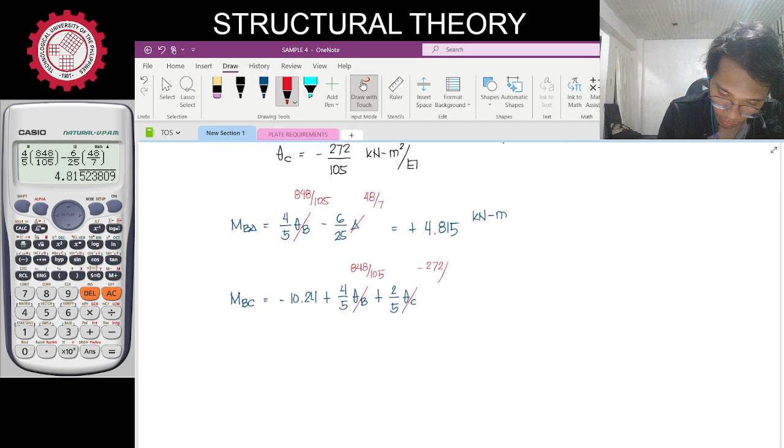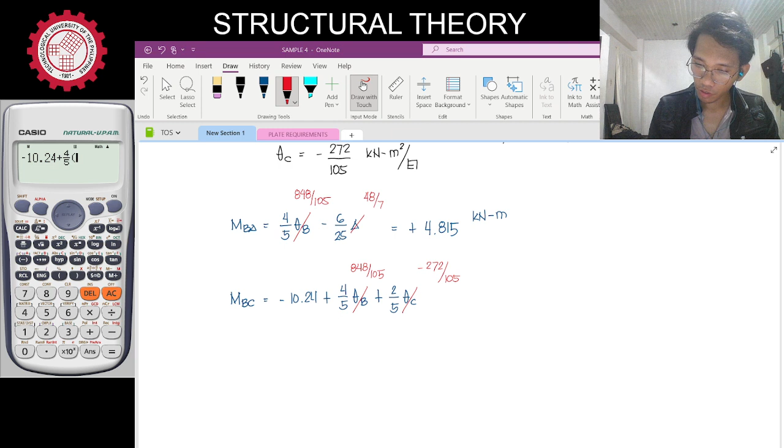272 over 105. Substitute: negative 10.24 plus 4 over 5 of 848 over 105, and then plus 2 over 5 of negative 272 over 105. So the answer now is negative 4.815.

There, you see, same magnitude. Negative 4.815 kilonewton meter.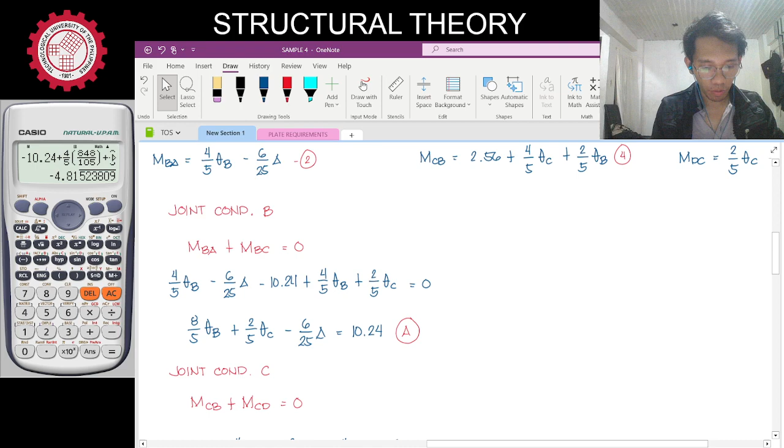And this is what I mentioned to you earlier, that they have their own sign convention based on their rotation. So you go back to the first joint condition: moment BA plus moment BC is equal to 0. So if you add these two moments, 4.815 plus negative 4.815, they just cancel out and become 0. That's why I always have you use positive values, because later on they will have their own sign convention.

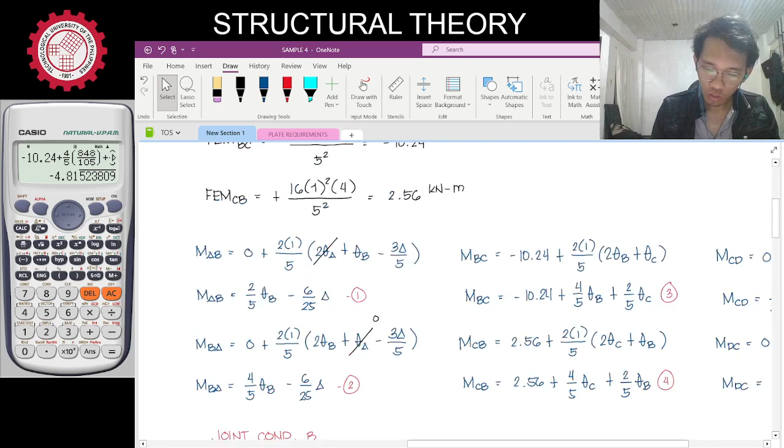Okay, for the internal moment at C, I will use equation 4, moment CB. Here it is now. Moment CB, moment CB, moment CB.

Moment CB is equal to - substitute the value of slope C. Again, slope C is negative 272 over 105, then slope B is 848 over 105. Substitute the values, so we will have 2.56, plus 4 over 5 of negative 272 over 105, and then plus 2 over 5 of 848 over 105.

So the answer is equal to 3.718, positive, so this is clockwise. 3.718 kilonewton meter. Okay, let's check another moment at C.

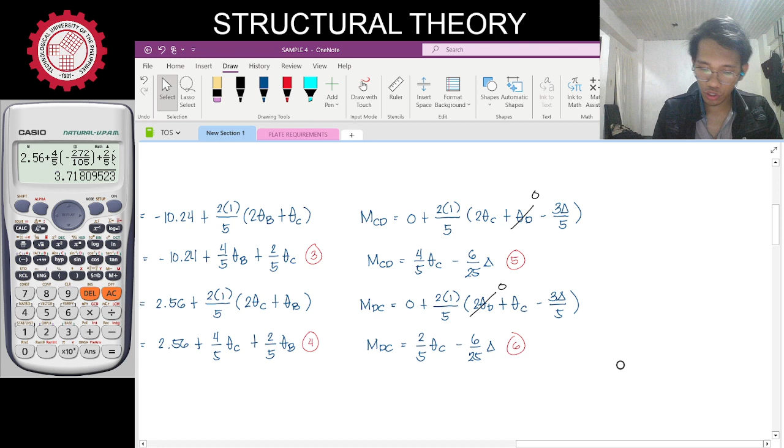Moment CD is from equation 5, internal moment CD. Let's check if our joint condition used earlier will hold true. Okay, so moment CD, this is equal to, let's substitute the values.

Our slope C is negative 272 over 105, while our delta is equal to 48 over 7. Substitute those values into the equation: 4 over 5 multiplied by negative 272 over 105, minus 6 over 25 times 48 over 7.

So the answer is negative 3.718. There, from your joint condition, moment CB plus moment CD, the resulting answer indeed becomes 0.

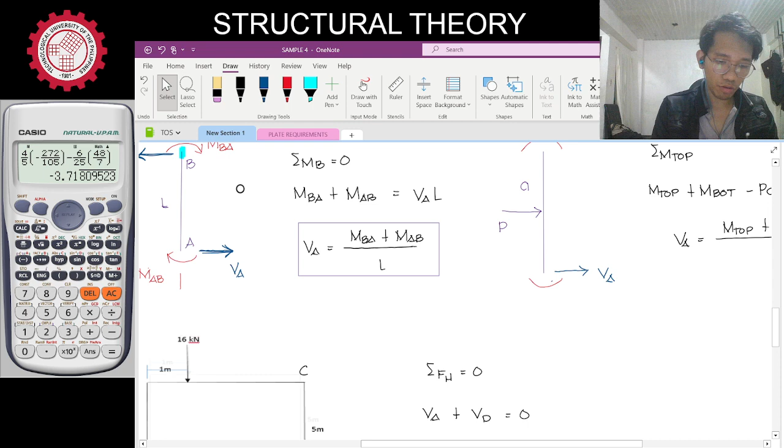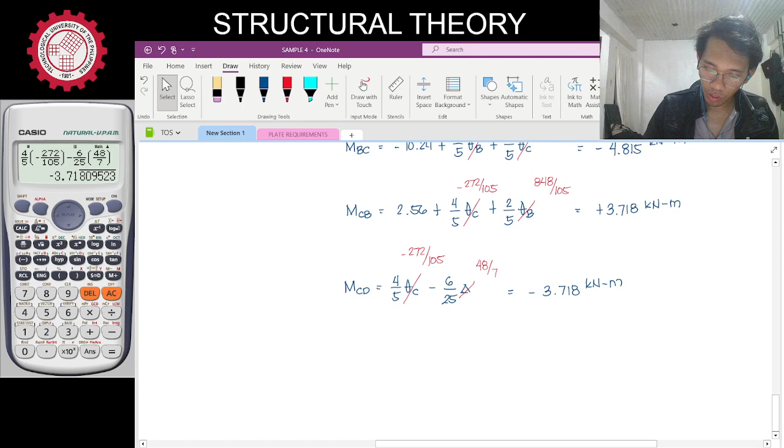Okay, so we've answered the problem. Internal moment for B is equal to 4.82, while internal moment for C is 3.72. That's correct, right - 4.82 and 3.72. Okay, so that's it, that's our sample problem for the slope deflection method of frames.